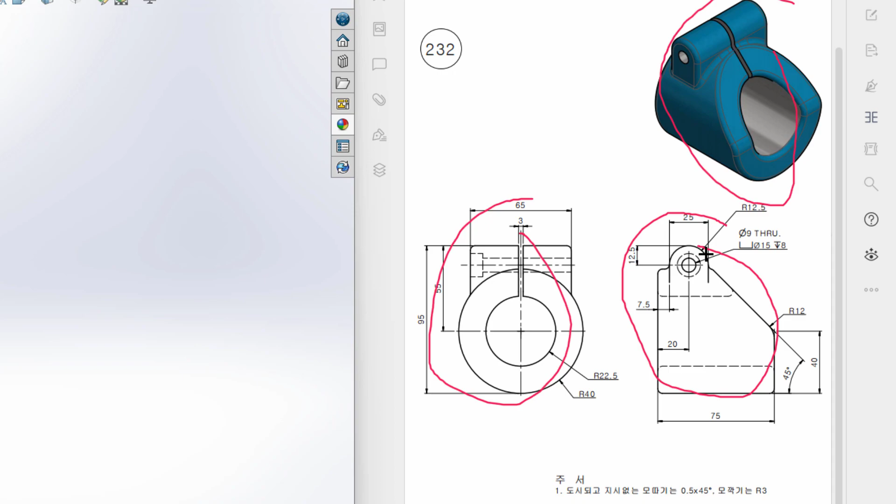Today we're going to solve this 3D problem. In this 3D problem, this is our left side view and this is our front view. First of all, I'll start drawing from the right side.

In the right side, first I'll draw this circle, and this circle has a radius of 40 units. Then I will extrude boss it to 75 units, in direction 1 to 20 units, and in direction 2 to 75 minus 20 units.

After that we can see we have another shape like this one. For drawing this shape I will go back to my right plane and draw a center line, which has a dimension of 55 units. Then I'll draw two offset lines, and both have a total distance of 65 units, so half distance will be 65 divided by 2. Then I'll close cap this shape, then extrude boss it to 25 units.

After that portion has been done, we can see in our sketch we have a circular cut here, and this circular cut has a radius of 22.5 units. Then we can see along this circular cut we have a thin rectangular cut.

For drawing this thin rectangular cut, along with this circular cut, I will draw a center line, and this center line has a greater distance than 55 units. Then I'll offset two lines, and as the total offset is 3 units, the half offset will be 1.5 units and 1.5 units. Then I'll close the shape, trim the extra portion, then cut it through all.

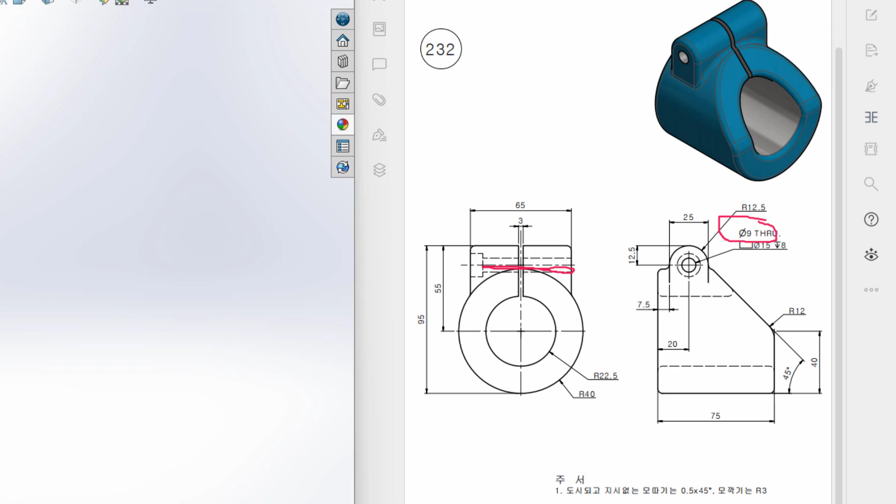Then we can see in our sketch we have a hole wizard tool here. This portion has a diameter of 15 units, and an extrude cut of 8 units. Then we can see this portion has a diameter of 9 units, and we will give a depth of 65 units in our hole wizard. So all the things have been explained properly.

Now go back to our SolidWorks. First I am going to select my right plane from here. Now right click on it, then sketch, then normal to it. After that select the circle tool from here.

Now draw a circle, and this time it has a radius of 40 units, so the diameter will be 40 multiplied by 2. Now isometric it for a better view. Go to features, now extrude boss, to direction 1. Let me blind it. In direction 1 I will extrude boss it to 75 minus 20 units, and in direction 2 to 20 units. Now press OK, so our first extrude cycle has been done.

Now again select the right plane, right click on it, then sketch. Now I'll draw another center line. Select center line and draw it, and this center line has a vertical distance of 55 units, so dimension it to 55 units. Then select smart dimension, then select offset entities tool from here. Now select this line, and as our total distance is 65 units, the half distance will be 65 divided by 2, so 32.5 units. Make sure to select bidirectional capping and line. Now press OK.

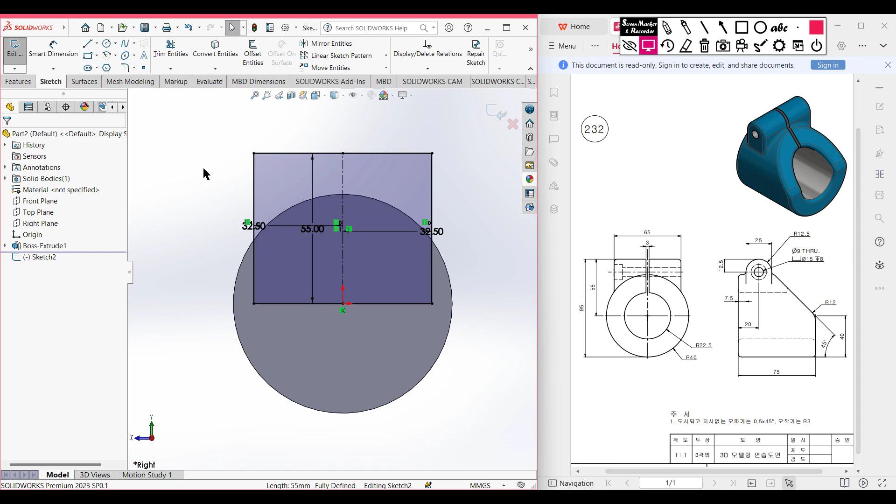Now isometric it for a better view. Now go to features, extrude boss, to 25 units, from the mid plane. Now press OK. So this portion has been done.

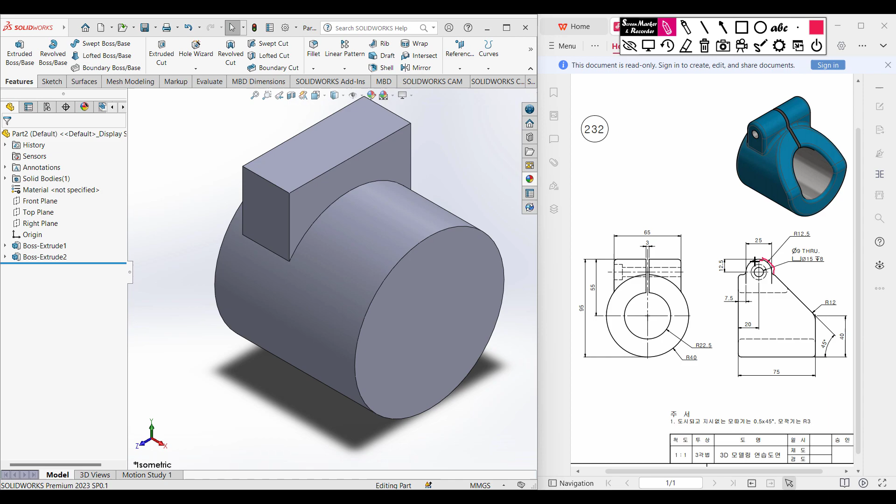Then we can see in our sketch we have a curved circular portion here, and this curved circular portion has a radius of 12.5 units, so we need to give a fillet of 12.5 units. Let's go back to SolidWorks. Now select the fillet tools from here, dimension it to 12.5 units. Now select this corner and rotate it, and select this other corner also. Now press OK.

Now isometric it for a better view. Okay, this portion has been done. Now select this front face.

Now we need to draw the extrude cut circle and thin rectangular cut. For that, I am selecting the circle tool here, and this time the circle has a radius of 22.5 units, so multiplied by 2, it will give the diameter.

After that, now select the center line for our thin rectangular cut, and we need to give a dimension of greater than 55 units. Okay, we have given a dimension greater than 55 units.

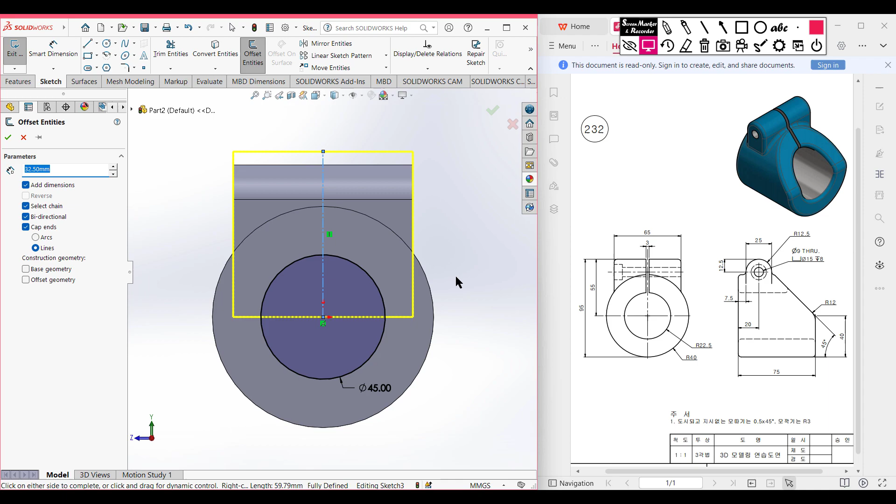Then select the offset entities and select this line. As the total offset is 3 units, the half offset will be 3 divided by 2, 1.5 units. Now make sure to click cap bidirectional cap in the line. Now press OK, now zoom it here.

Okay, now select the trim entities and trim all the unnecessary lines that we don't need. Now press OK. Now isometric it for a better view.

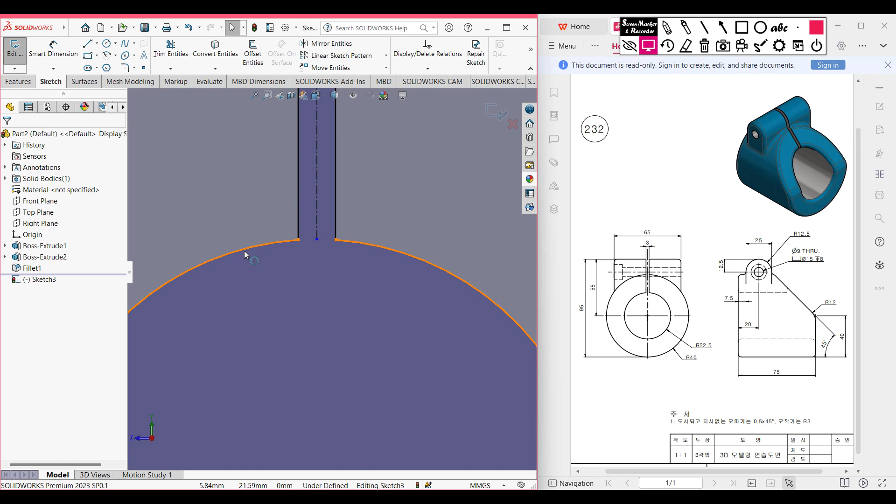Now go to features, now extrude cut. Extrude cut into through all both, so cutting into through all both. Now press OK. So this portion has been done.

Now we need to draw the incline cut. For that, I'm selecting the front plane from here. Now right click on it, now sketch, then normal to it.

Now select a line tool from here. You need to place this from this ground about 40 units. But as our circle has a radius of 40 units, we don't need to dimension it again. If we place this at the center line, it will have a vertical distance of 40 units automatically.

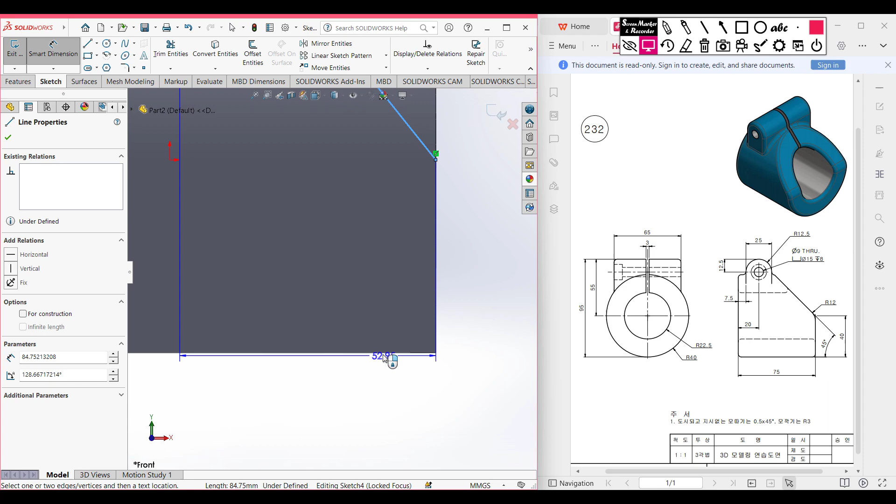So draw an incline line. After drawing this incline line, I need to select the smart dimension tool, and from this incline line to this horizontal line, okay, this angle is 45 degrees. So dimension it to 45 degrees. This dimension has been done.

Now press OK. Now you can draw a line here, or you can select this previous existing line. Now you can select the convert entities. Now you can see our line has been converted.

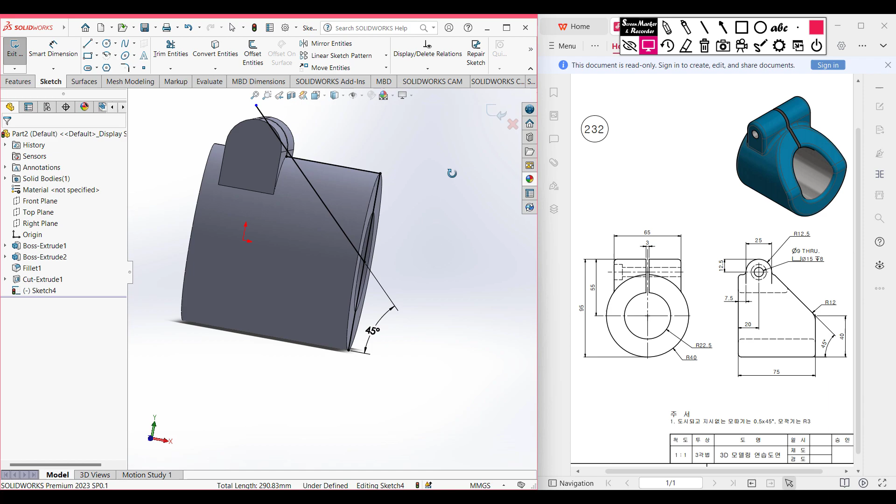Okay, now isometric it for a better view, then normal to it. Now select the trim entities and trim the lines that we don't need. So we don't need these two lines and also this extra portion. Now press OK.

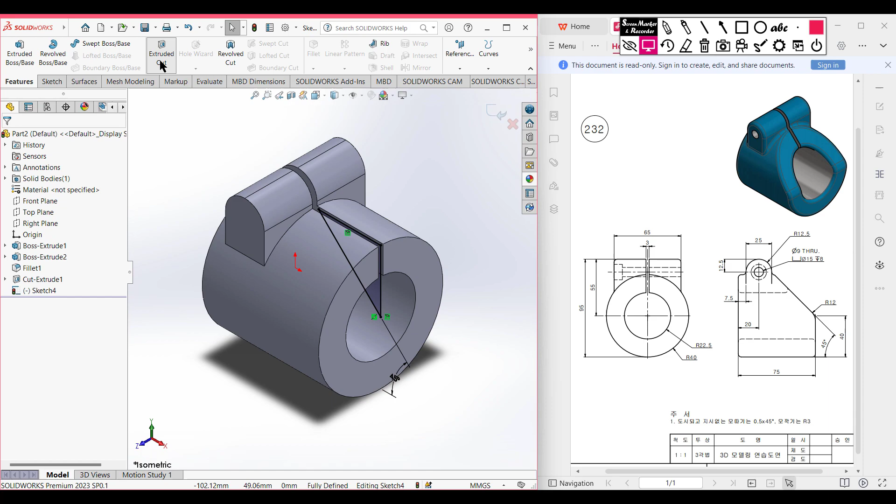Now isometric it for a better view. So we can see that our rectangular cut has been done, incline line. Now go to features, now extrude cut, into through all both. So I'm extrude cutting into through all both. Now press OK. So this portion has also been done.

Now it's time for hole wizard. So I'm selecting the hole wizard tool from here, and now select the legacy hole. Then from that select the counterbore hole, and you can see this shape quite matches our shape of the hole cut. So as we have discussed, our counterbore diameter is 15 units, so we have given the diameter 15 units.

And it has an 8 unit through. Our other diameter was 9 units, so it was 9 units, and the total depth, here to here, is 65 units. So we have given the total depth as 65 units.

Now go to position, now go to 3D sketch. Now position the sketch. As we have said that this sketch is our left side view, this portion is, we are seeing, around this side. As this is our left side view, that's why we need to rotate our sketch.

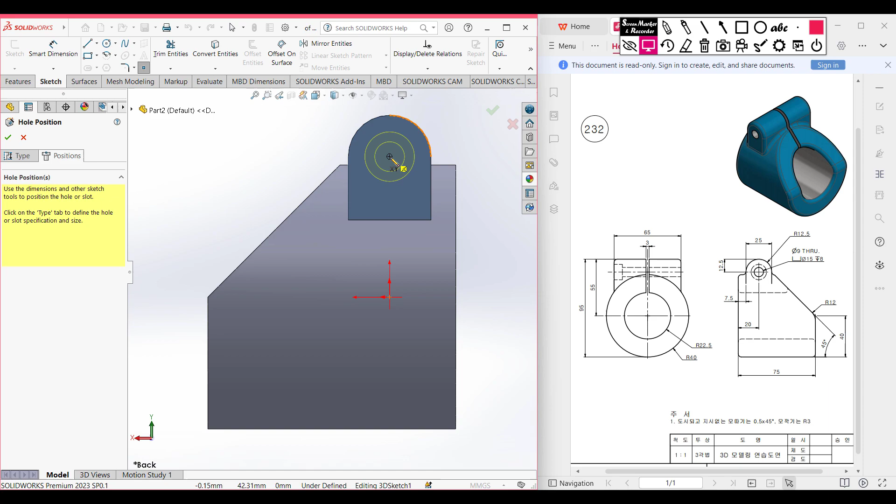Now place this to the previous circle or fillet center line, center point, previous fillet center point. Now press OK, so our hole wizard has been placed. Now press OK here, and our hole cut has been done. Now isometric it for a better view.

Now finally it's time for the fillet. So in our case we can see this portion, along this line or this line, you can see it has a fillet of radius 12 units, and on the other side we can see it has a radius of R3 units.

There might be a radius of R3 units. If you want to give a chamfer, you can give a chamfer of 0.5 and 45 degrees. I'm not giving the chamfer, but if you wish, you can give it. Here I am giving the fillets of radius 3 units.

Now we are going to our SolidWorks. Now I am selecting the fillet tool from here, and this time our fillet is 12 units. So I'm selecting the dimension of 12 units here and selecting these two edges. Okay, this fillet option has been done.

Now again I'm going to the fillet option from here, and now we are going to give all the 3 units fillet. So I'm giving all the 3 units fillet here. Now select this circular line, then select this vertical edge. Okay, it will select all the portion that is related to here. Again selecting this circular line and this vertical line, it will select all the lines automatically.

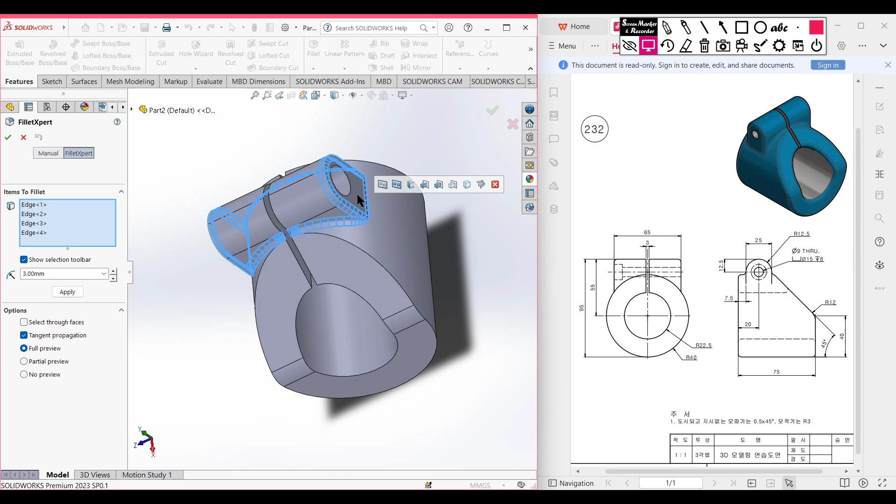Now you can select this line, it will also select all the points connecting here. Then you can also select these inner lines for all the inner portion. Now we can rotate and select this back left circular line. Now press OK, so it will take quite a time.

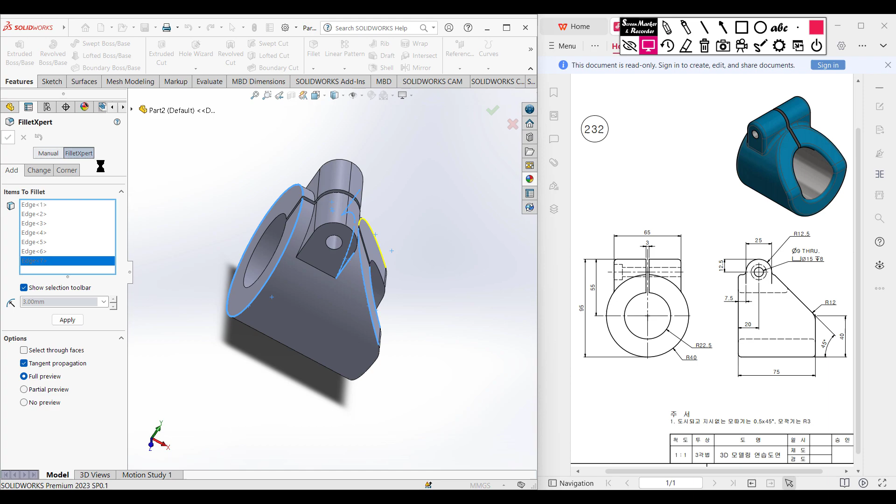Okay, it is showing broken features because some fillets are intersecting each other in this portion. That's why the message was shown. Now press OK. So our fillet has been done quite well. Now isometric it for a better view.

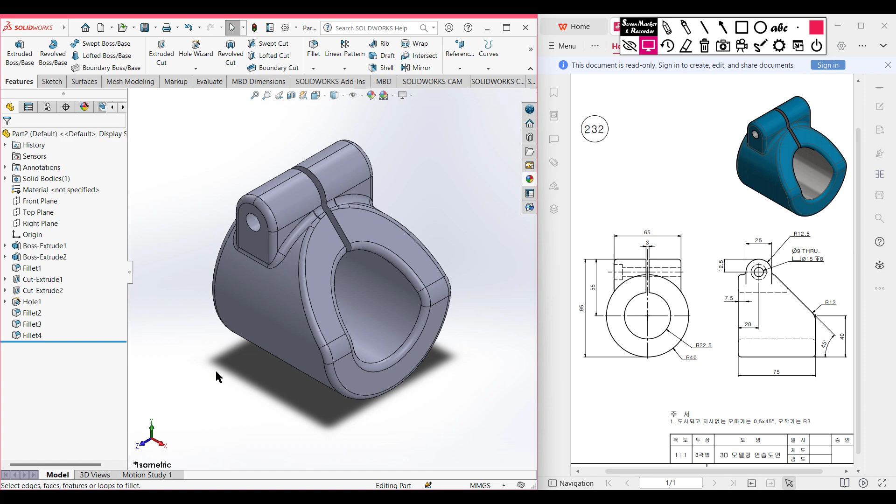So as you can see, we have done a 3D sketch. Thank you for watching till the end.